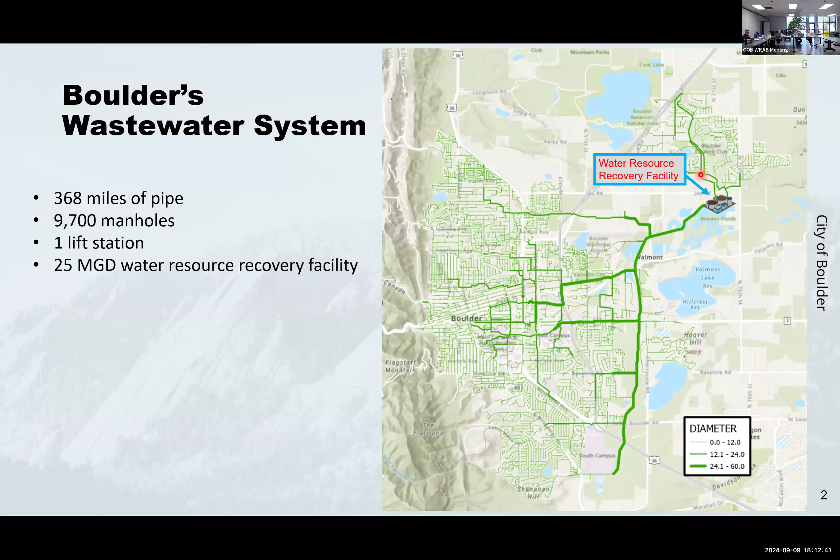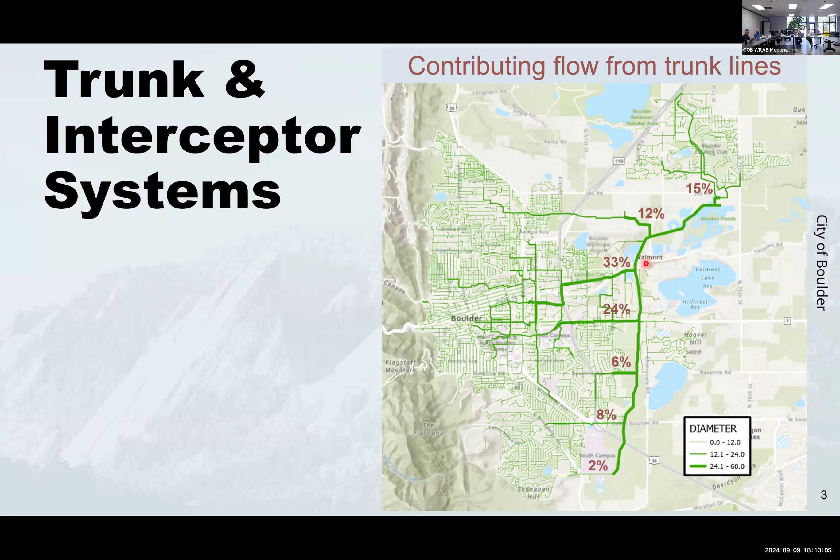So a little bit of flow comes from the southern side of town, and as you continue progressing north, you're picking up more and more flow. The area we're really interested in is once you get to the Valmont Butte Mill area, where it turns and goes east to the treatment plant - we're carrying a pretty sizable amount of flow at that point in the system.

This project actually has a very long history - there are references to a pipeline in this general area dating back to the 1960s, when a lot of the planning projections around the city of Boulder were a lot different than they are today. There were plans for an interceptor pipeline that went to a treatment plant in roughly the same area.

The need for that went away after some of the plans changed, and those areas were never annexed into the city. But the existing line that carries everything to the treatment plant was built in 1968. And in 1969, we had a major flood, and we actually lost part of that interceptor pipeline that had been in operation for about a year, maybe even less.

So the treatment plant at 75th was offline for some time. At the time, the plant that used to be here near the MSC was still operational, but the brand new shiny wastewater facility was only operating for a little while.

In 2013, that nearly happened again, but for some heroic efforts of kind of a cowboy operator who got in and basically put the creek back where it needed to be, and that kept our system intact. There were some pretty heroic efforts back in 2013 that really kept this thing alive, but that really brought to light some of the vulnerabilities we have in this area of our utility.

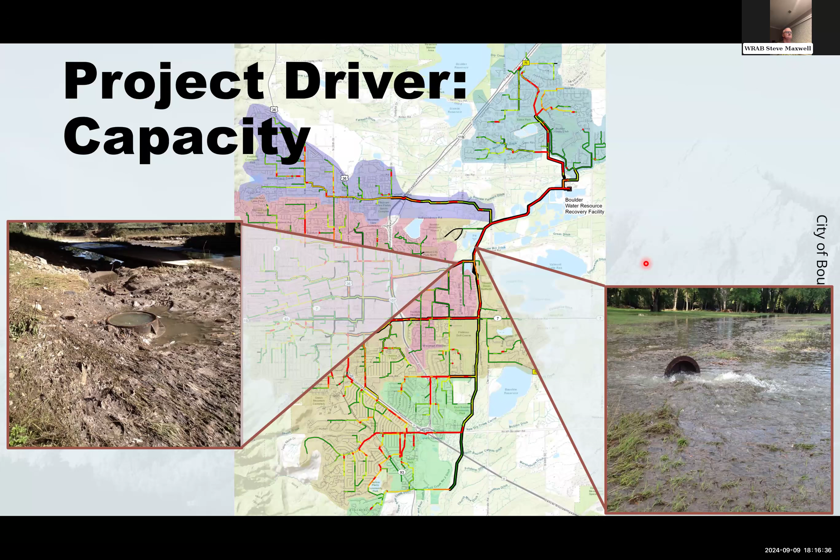These couple of photos on the screen are in the area of the existing interceptor, and they did result in sanitary sewer overflows back in 2000. Project driver number 1 is capacity.

Project driver number 2 is conditions. Again, there was a lot of thought put into where the treatment facility was, but the materials and construction available in the 1960s have really started to show their age. There's a lot of internal corrosion that we start to see with reinforced concrete pipe.

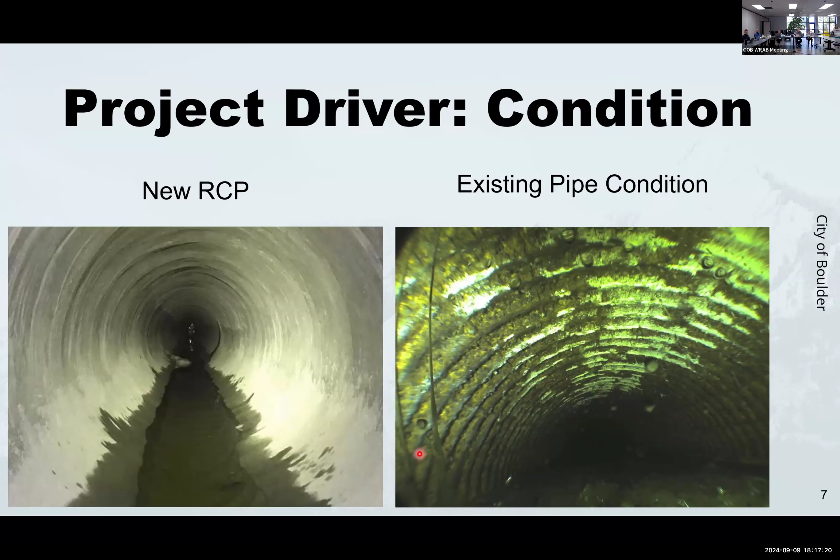The figure on the left shows what a brand new pipe looks like, and the figure on the right shows a 2014 inspection of this line, which shows a lot of exposed rebar. This is a lot of soft concrete, and there are concerns with the structural integrity of that part of the system. Project driver 3, as I mentioned, is flood vulnerability.

This purple line is the existing interceptor. These are photos from the 2013 flood where Boulder Creek had jumped its banks. It's a meandering stream—that's what meandering streams do. In this case, Boulder Creek was running immediately over and washing out the material around our interceptor line.

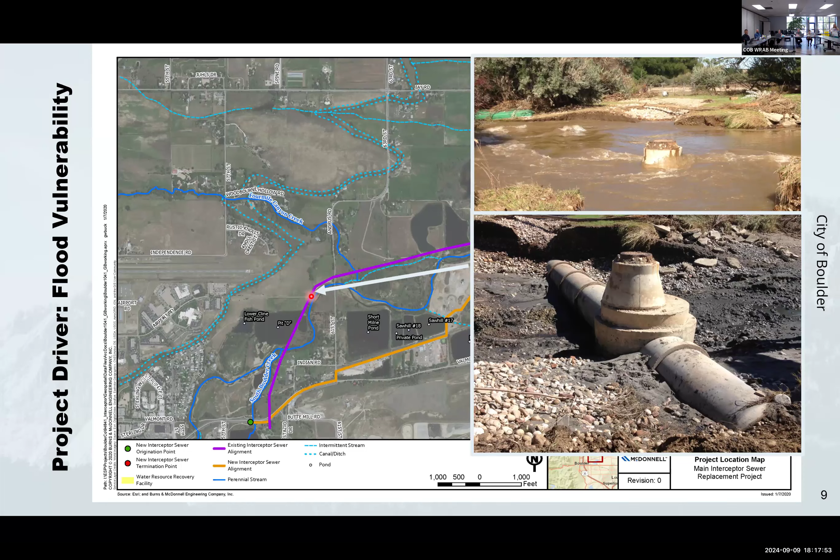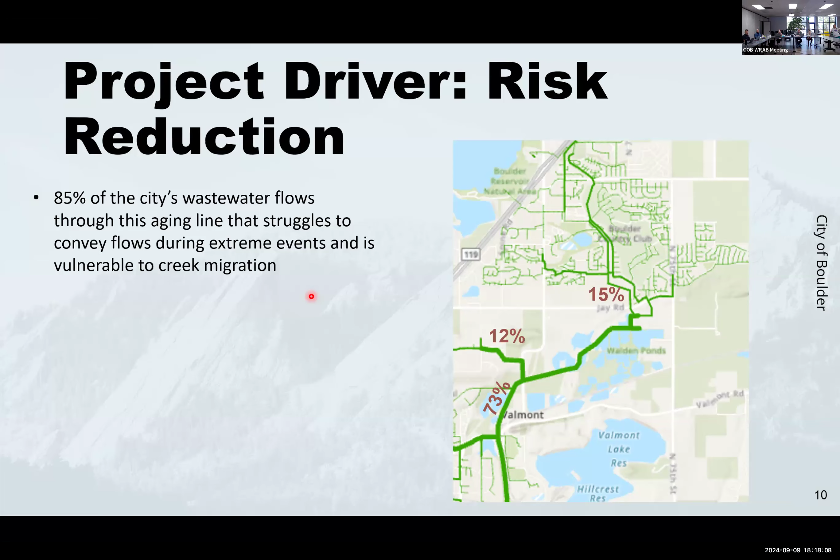So really, the overall goal of the project is risk reduction. About 85% of the city's wastewater flows through the large diameter piece of this line. It struggles to convey flows during extreme events, and it is vulnerable to creek migration.

And then phase 3 will rehabilitate and strengthen the remaining segments that need to stay in service and can't be served by this new line. You can see in the background some green lines coming up from the north here, up along 63rd, and also some flows from the airport road area.

Those will remain in service on the old pipeline because by gravity, we weren't able to get them down 61st into the new main. So phase 3 will rehabilitate those remaining segments and add some reinforcement to them in case something happens with the creek in the future.

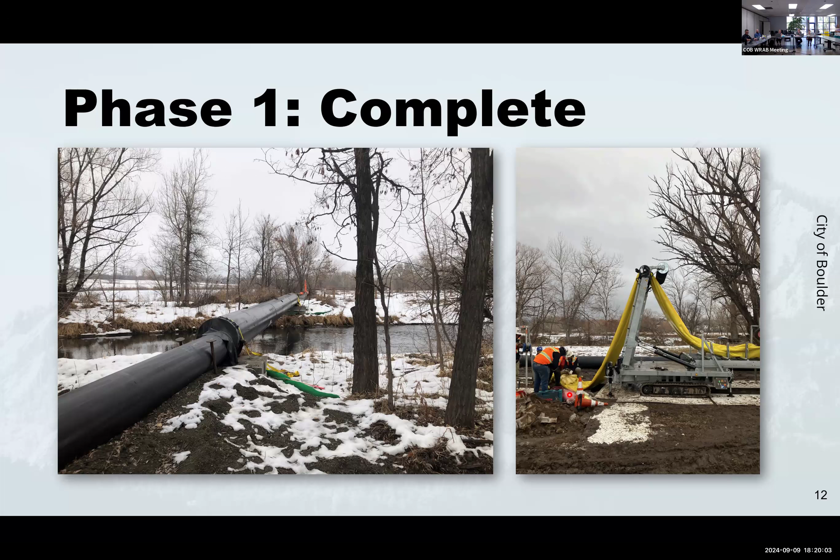So this is some photos of phase 1. Installed a liner in the existing pipe. This is a bypass that went over Boulder Creek, and essentially it's the same or similar technology to the sanitary sewer lining program.

You know, the ones that are in residential streets, just on 42-inch pipe instead of 8-inch pipe. So the end result of phase 1 started with a pipeline that looked like this and ended with a pipeline that has a brand new pipe inside of it.

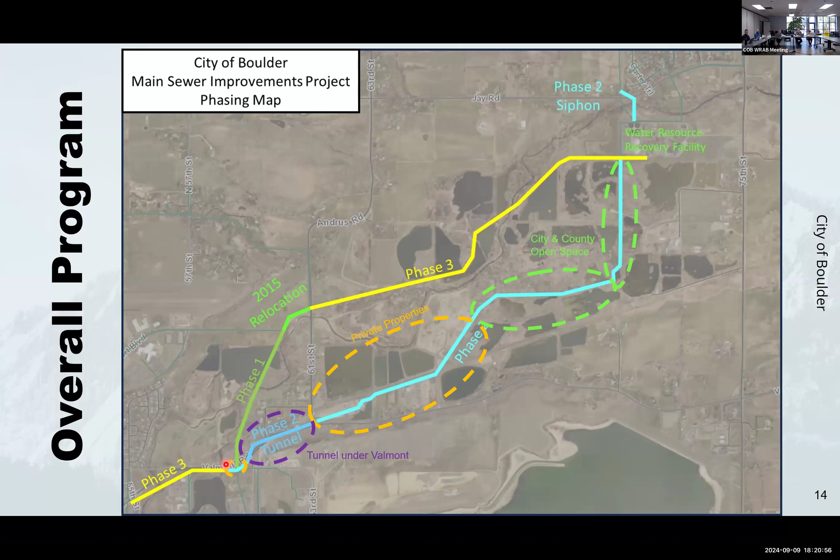And then in front of the community on Valmont Road, and eventually ties in at the north side of Western Disposal.

So one of the spots we're gonna check out today are the tie-in points at Western Disposal, as well as a tunnel location, kind of in that same area. So we'll see a lot of open cut construction over at Western.

This is where we need to intercept a couple of existing large diameter lines, pick them up and send them into the new pipeline. There's also some tunnel construction under Valmont Road that's gonna be very interesting to go see.

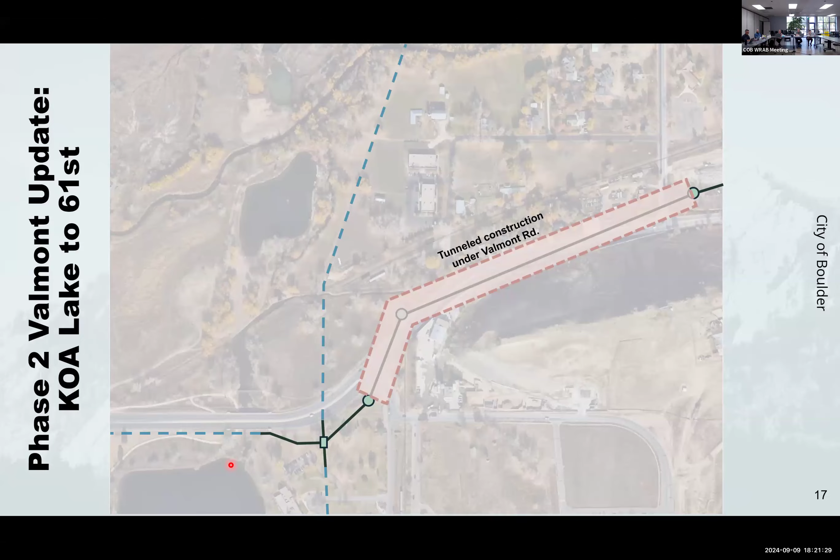And on that tunnel note, what you'll see out there is a pretty impressive construction operation. It looks like a lot, but there were some very good reasons for us to approach building a tunnel in lieu of open cut along that corridor.

One is a lot of those homes that are on Valmont are on private drinking water wells. We were concerned with the depth of this line, that when we go for construction dewatering, that we could actually affect their water wells. So we made a decision to extend a tunnel quite a bit further and mitigate the impacts to those wells. It also means there will be no closures for local residents.

Limits commuter impacts and bus routes. Boulder County was pretty adamant about working hours in this very busy corridor. It would really draw out how long we'd be there and the length of time that we'd be affecting those residents and commuters coming in and out of town.

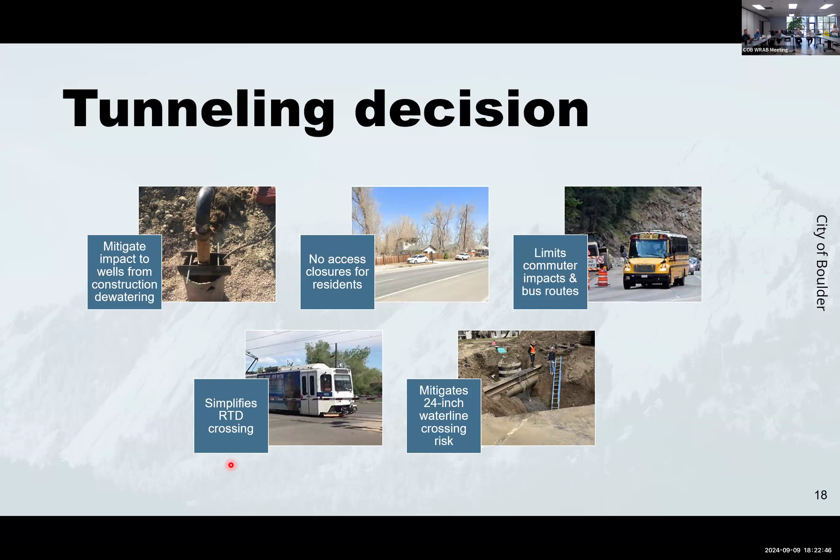There's also an RTD crossing. You won't see the tracks because they're covered in asphalt, but we still had to work through the same permitting processes with RTD that we would for any other project. And there's also a transmission main that goes through that area, so we mitigate some risk to crossing one of our critical water lines. Let's get those figures.

So essentially what you'll look at the tunnel, it's called a micro tunnel. So there's at the front of this machine, there's a tunnel boring head. Think of it like a big blender, big drill in the ground, and it's kind of grinding up the dirt in front of it, and it's pumping everything out as a slurry.

All that slurry goes to a separation plant, and they remove all the dirt out of it, and they recycle the water, and they just keep kind of pumping it out as a hydraulic system. And as they're doing that, they're pushing pieces of casing pipe inside of the hole and kind of progressing it forward.

So what we'll see is a similar setup to this jack frame that's pushing the casing. We'll see some pipes that are sitting out there, and we'll see a lot of the separation equipment and all the widgets that kind of make it work.

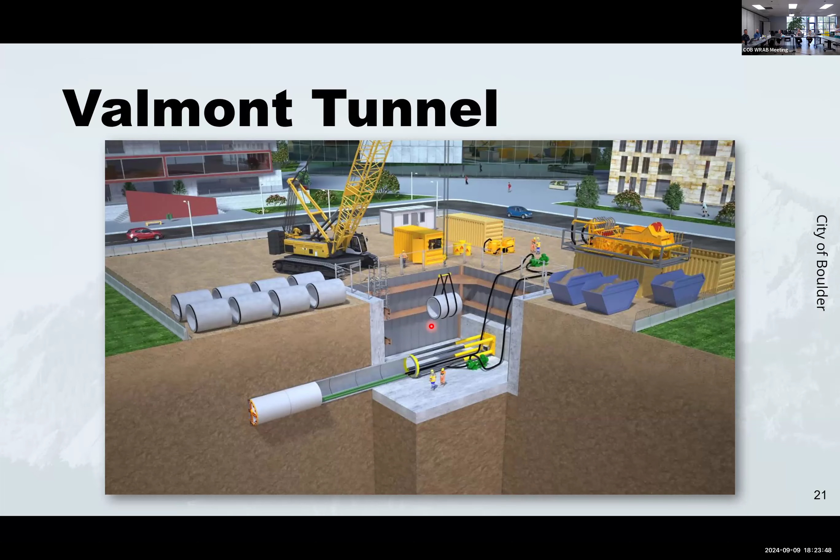So some field photos of what's going on out there. We'll see launch and receiving shafts that are watertight. We'll see this tunnel boring machine. Well, we won't see the head of it, because it's underground, but we'll see where they're pushing the casing in.

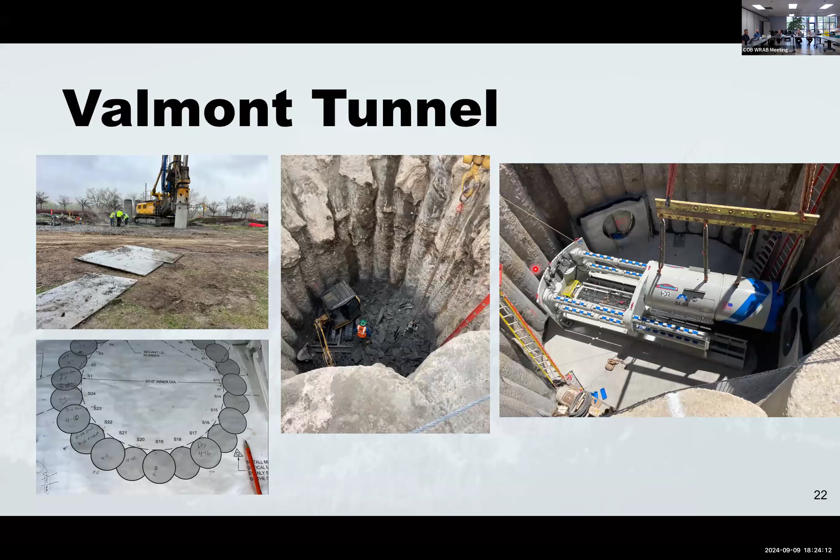And kind of checking out how that system works. And we'll also be able to see a lot of how they built the shafts. It's a pretty impressive operation there.

So essentially that tunnel looks like 3 watertight shafts. One is to launch the tunnel, and then the other 2 are to catch it when it gets to the end. So we'll spend most of our time kind of at this launch shaft.

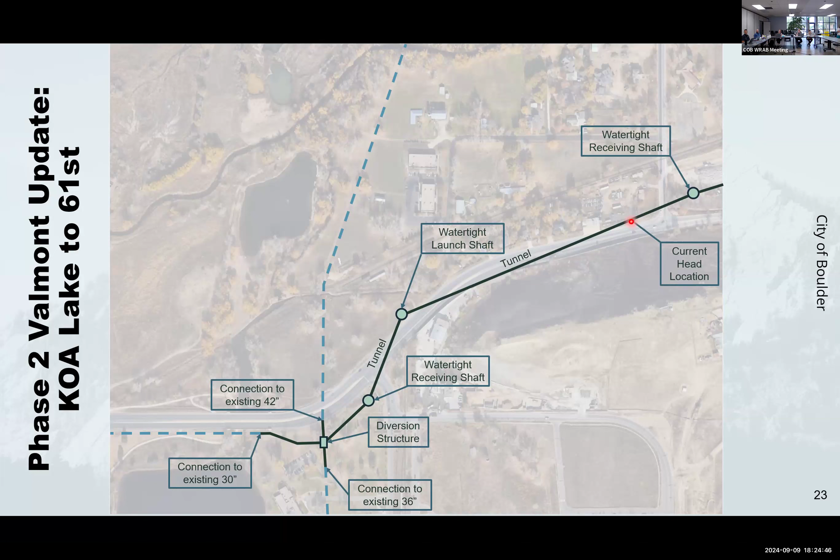That's where all the excitement is. But we do have one of these things already installed, and we're making good progress on the second of the 2 tunnel drives. So currently, we're almost to 61st, I would say. We're getting pretty close.

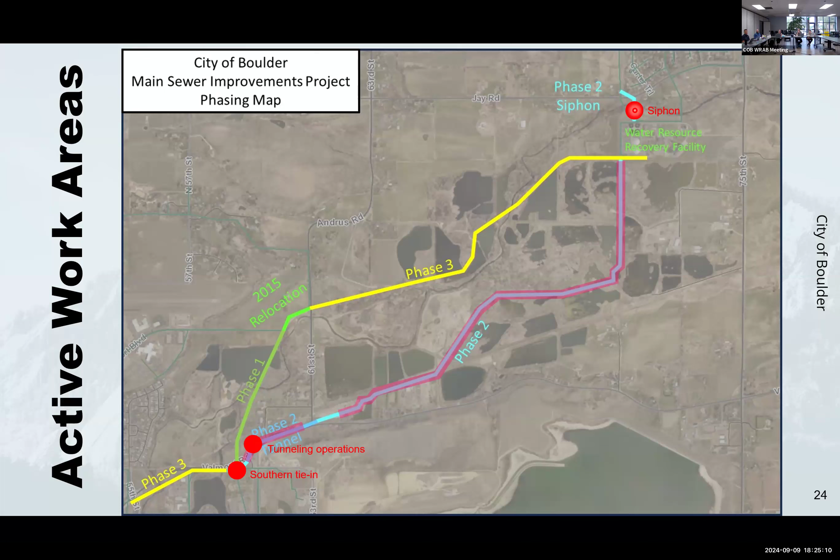So, active work areas on the project right now: again, Valmont and Butte Mill over here at the Western Disposal site, tunneling operations up here, and if there's time and we still have daylight, we can go check out the inverted siphon site near the water resource recovery facility. We'll see how time works out.

And with that, I'll turn it over to Craig to give us a little safety briefing before we head out.

Are we going to the bore site first? I think we probably go to Western first and then walk or drive across. Okay, there should be enough parking on site. If you want to send out an address, we've got a city vehicle that can fit almost all of us. Oh, perfect, that makes it easier then.

So typically before we go out on any job site, we go through a job hazard analysis. That's just acknowledging what kind of risks or hazards there are and how we control for them. Obviously no work is going on right now, but there are still hazards of walking around the construction site.

The main ones we're going to look out for are slips, trips, and falls. There are cables, hoses, and rocky areas at the entrance to the site - it's supposed to knock dirt off your tires. All that stuff is really easy to trip on, so just watch where you walk.

Hopefully everybody's got some closed-toed shoes. I don't think we need a full PPE setup for tonight - there won't be any equipment operating or anything like that.

We're going to be looking at some open excavations. There's some cool stuff going on down inside of those excavations. Try not to lean on the handrail set up around us - that's really just there for safety, and it's not great if everybody's leaning on it at the same time. It's tempting, and I'm sure I'll do it a little too, but try to avoid it.